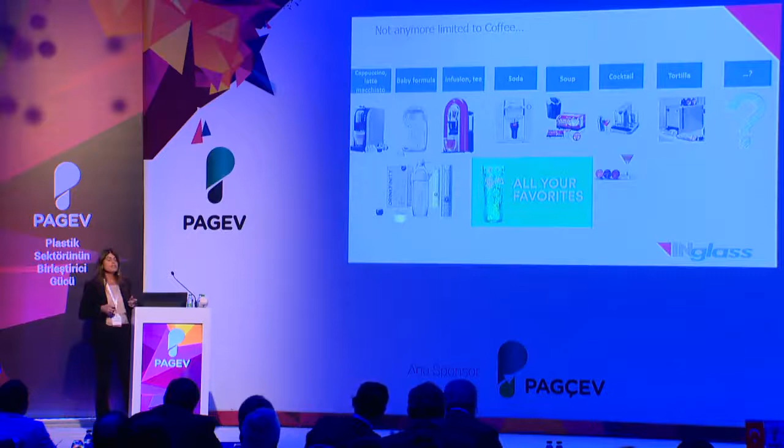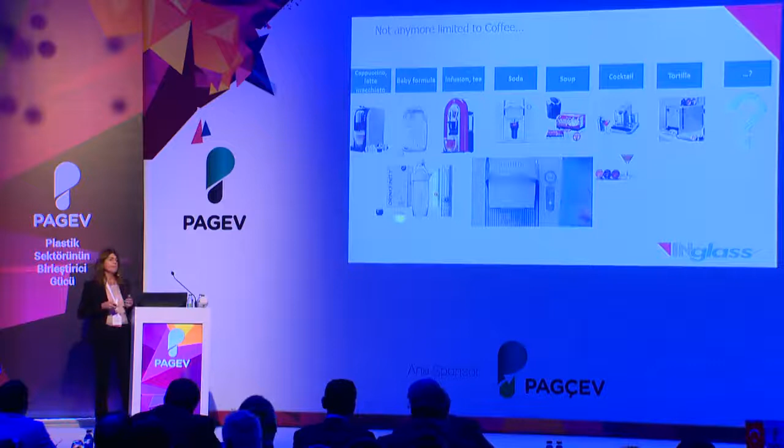This means that you can even have 1.5 liters of Coke or any other carbonated soft drink by using a machine exactly like the one you use at home for coffee. This is also going on with soup, with cocktails, with tortillas, and the idea is to use this also for products like meat, complete meals.

But coming back to our discussion panel, plastics are permeable. So what happens? Oxygen, odors, water can get in, and in the same way aroma can get out. So the plastic material selection is absolutely critical, and even more new materials are coming on the market which are challenging for the injection process.

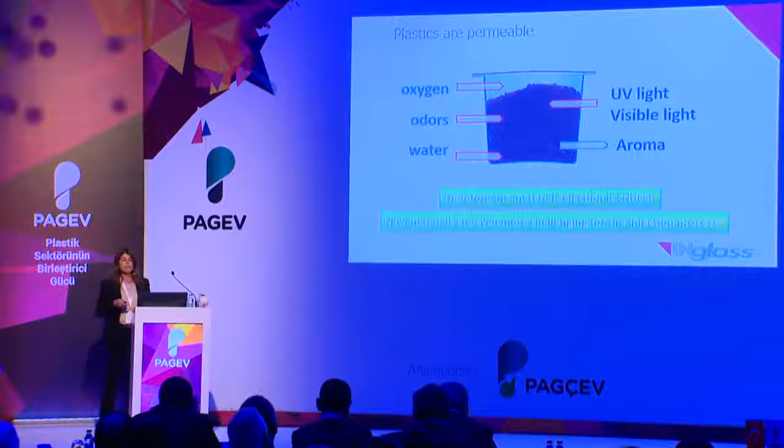For instance, today in this market, polypropylene is still one of the main resins used. Why this? Because of the easy processing, and I would say also the expertise that has already been acquired in this, good water vapor barrier, that is, I would say, better for powder but not for ready meals, and the compatibility with in-mold labeling and coating to enhance the oxygen barrier. That makes the product last longer.

One other resin, which is also starting to come, but which makes a difference in the difficulty to inject, is PET. Because PET is an attractive material which is accepted by the consumer, has an easy recycling chain, and is for sure better in oxygen barrier than PP, but it should be used in PET bottle grade. That is around intrinsic viscosity 0.82.

Then we have new materials coming up, and this is the key game now. PLA, so biosourced material, PBT with higher barrier but not so much biosourced, PEF, and more to come. And we also have to cope with the drivers, which are sustainability and performance, that is, again, the barrier. So the current challenge is really how to process them, and how to assure the best quality and ready-to-market single-serving capsule made of these challenging new technical resins, but in the shortest time.

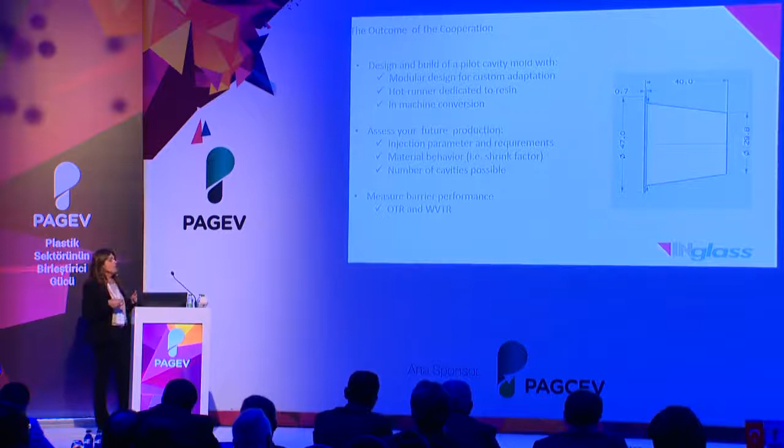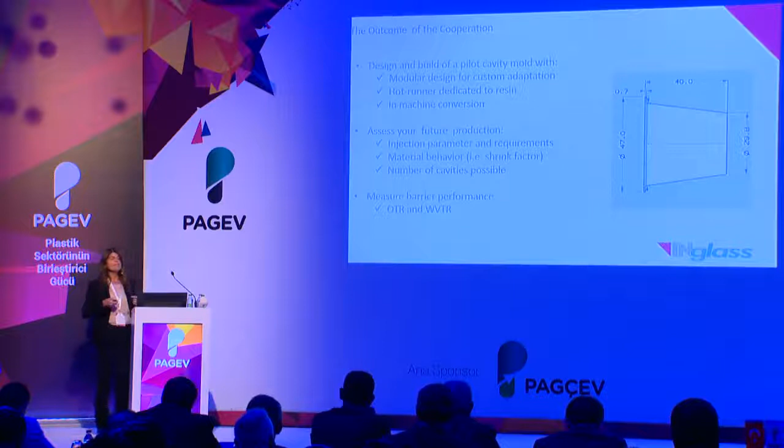The result of our cooperation is that we have built and designed a pilot cavity mold with a modular design for any customer adaptation. And also, of course, a hot runner dedicated to the resin that the customer wants to inject. There is also the possibility to use different versions in the injection machine, and so to convert very easily. In this way, you don't need to stop your production. You can have your design and development done by experts outside without a big investment.

The shape that we have chosen is an intermediate size among all the single-serving capsules which are right now on the market. And also the section of the part has different sizes according to the material injected. For instance, for polypropylene we have a thickness of 0.5 here and 0.4 on the side, while for technical materials like PET, PLA, PBT, we are using a thickness of 0.7 and 0.6 on the side. And of course, any other material which is in development can be tested here.

This mold offers versatility for any test layout, not only for testing resin, but also for testing in-mold labeling and plasma coating. I open a small parenthesis here: why IML? Because there is in-mold labeling now which is also functional, which has oxygen barrier in it. So you can have decoration and functionality in one step only. The point is that the in-mold labels now on the market are still polypropylene with EVOH film in it, but new sustainable ones are going to be developed.

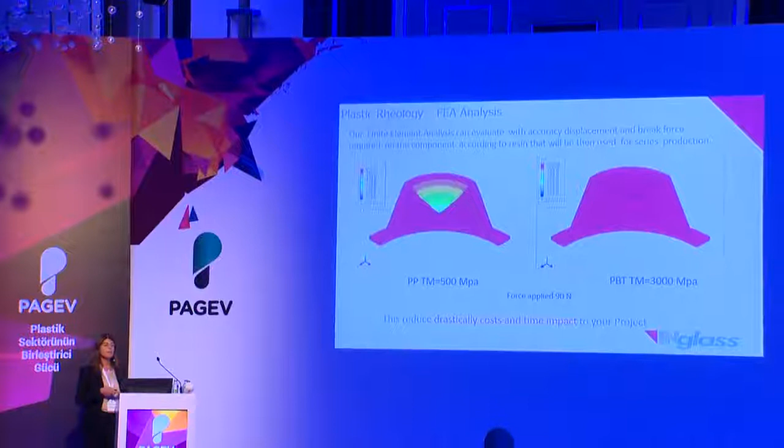If you see, so plastic rheology, finite element analysis, and the SLM conformal cooling technology, what could be also called 3D steel printing. Talking about the plastic rheology, with our finite element analysis we can evaluate with accuracy already the displacement and the break force which is required by the component according to the resin that is going to be used in production. I make an example just here.

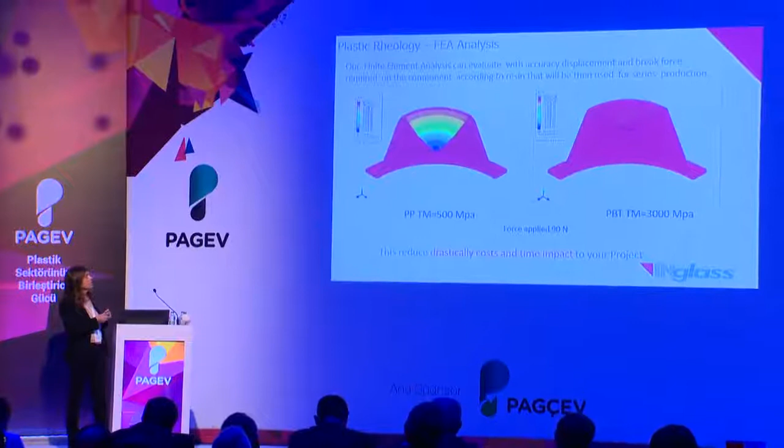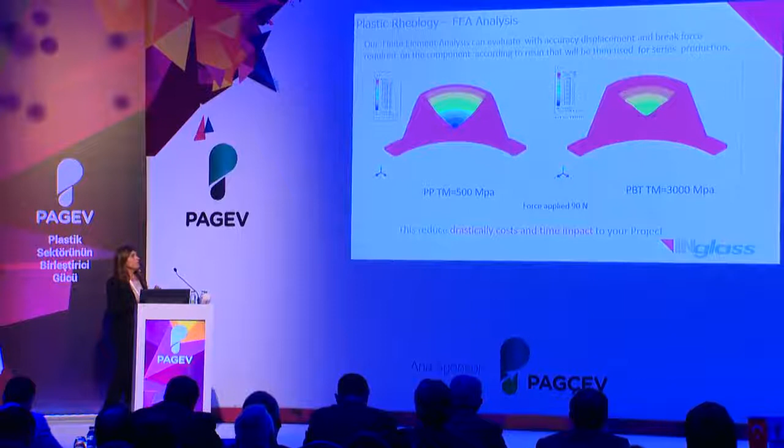You see here on the left side, you have the displacement using a kind of polypropylene, while on the right side you have the displacement that you are having with the PBT resin, at the comparison of the force applied of 90 Newton. This means that you can drastically reduce the cost and time impact to your project if you are thinking to get into this new market.

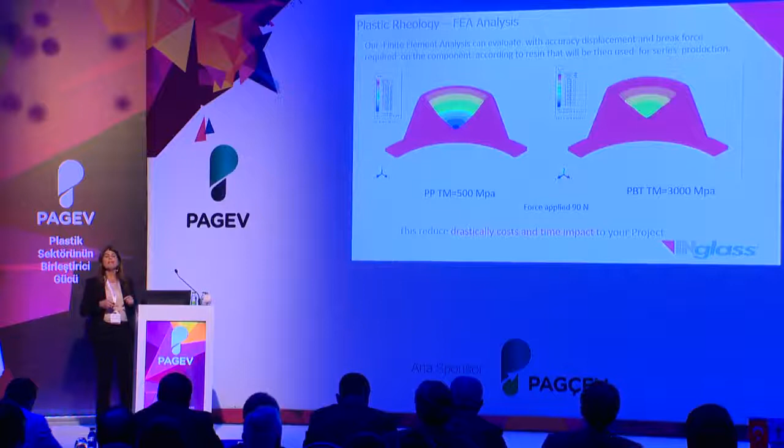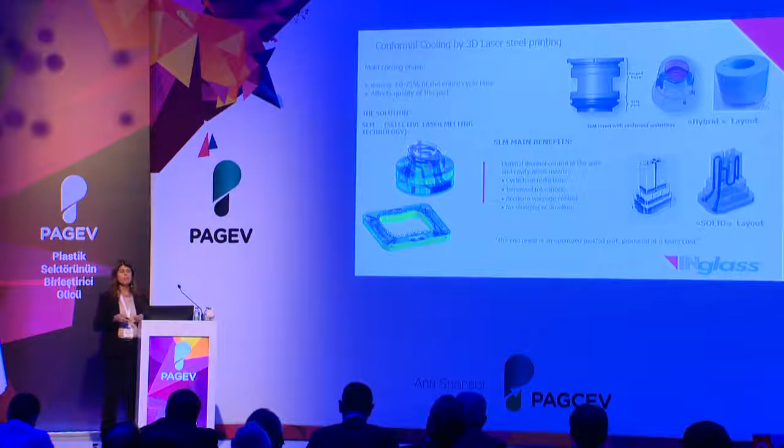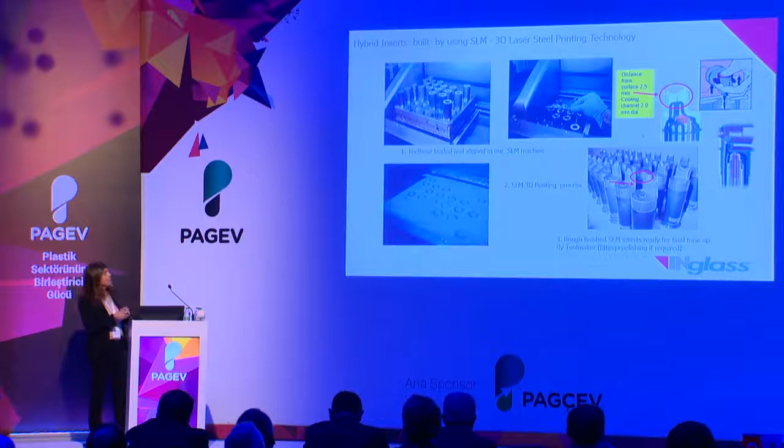Another technology that we have internally as our proprietary is the conformal cooling by 3D laser steel printing. Many of you probably know already, but the mold cooling phase means 60–75% of the entire cycle time, and it also affects in a large part the quality of the result. So in our company we can provide any kind of these inserts, and just very briefly I show you how this works. You have a base which comes out from the tool making directly. It is directly put into the machine, and then it starts the SLM 3D printing process.

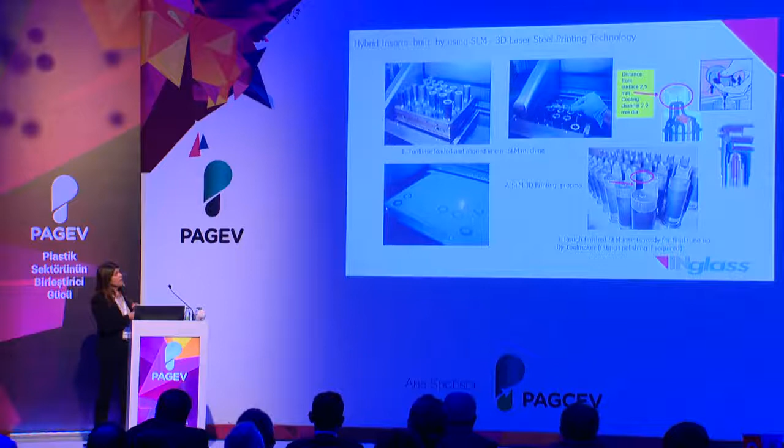In this particular case, it was used for this application, which is a tab where the sealing has to be very tight because a liquid is passing by. So we had to come with the cooling at just 2.5 millimeters from the molding surface, and also the cooling channels could not be so big because of the size available. So we made here cooling channels of 2.0 millimeters of diameter. So the result is, of course, a part that can keep the best cooling condition, even if the space is so reduced.

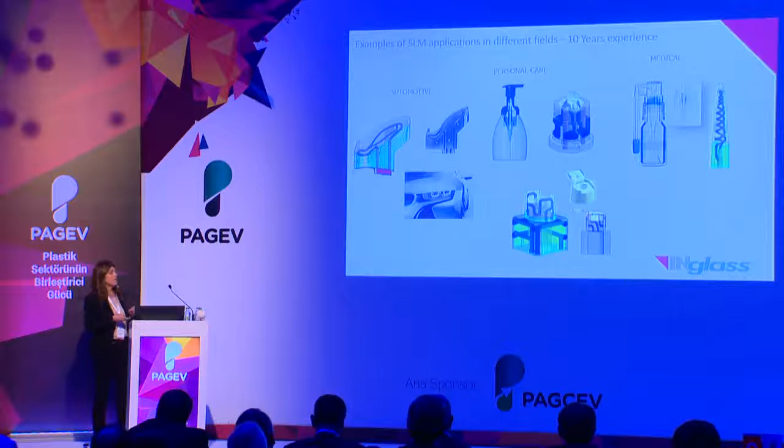Our experience in SLM application is in all different fields of plastic, from automotive to personal care to medical as well. Coming back to this application in particular, specifically the mold I showed you before, we designed the SLM technology for the cooling nozzle bushing, for the cavity, and for the core insert. Why? Because the important thing is to have a very good conformal and even temperature that you could not reach without having the cooling bushing close to the nozzle.

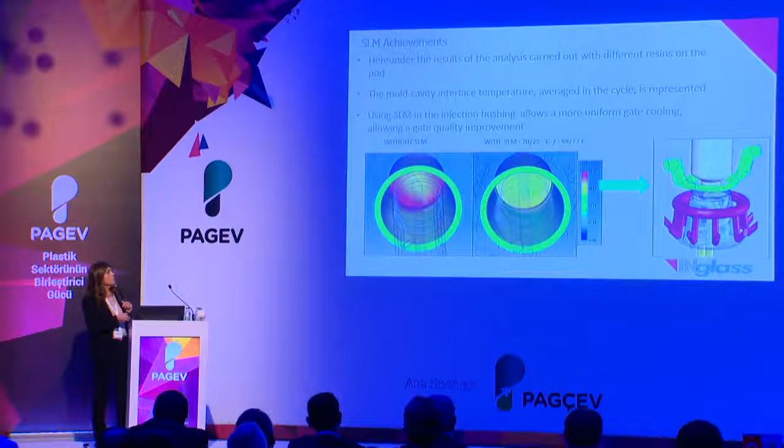You get even 25 degrees less and also very nice uniform cooling. That is very, very helpful when you talk about materials such as crystal clear PET. More than the results that you're having in the injection of PET, even at very low thickness like 0.6, 0.7, there is also the fact of reducing the cycle time around 30% compared to traditional.

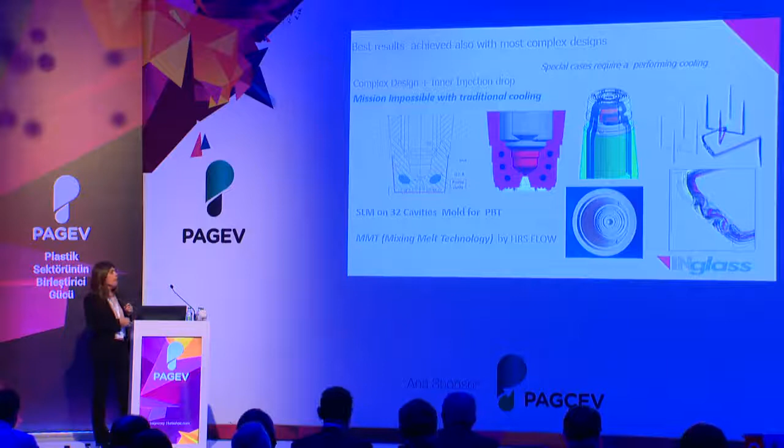Finally, an example of a latest coffee capsule in PBT material. In this case, we built for the customer a tailor-made solution because the injection point wants to be in the pot. We put all the cooling circuits just around the nozzle inside the pot, and in this way we were able to inject a system of 32 cavities for a coffee capsule in PBT, also by using our mixing melt technology, where we also use the conformal cooling section into the channels of the hot runner.

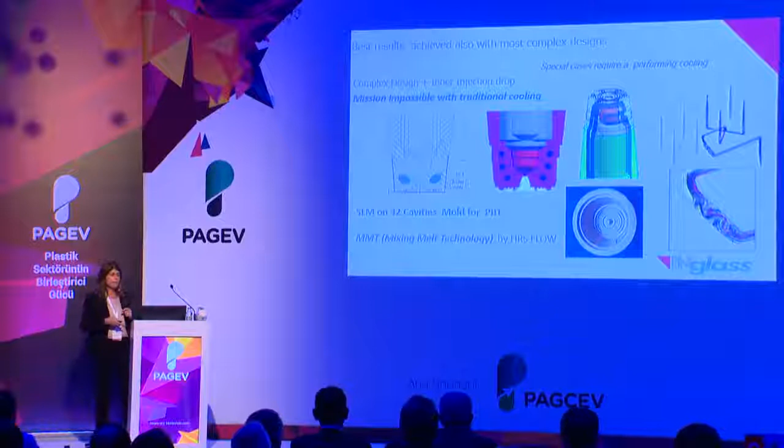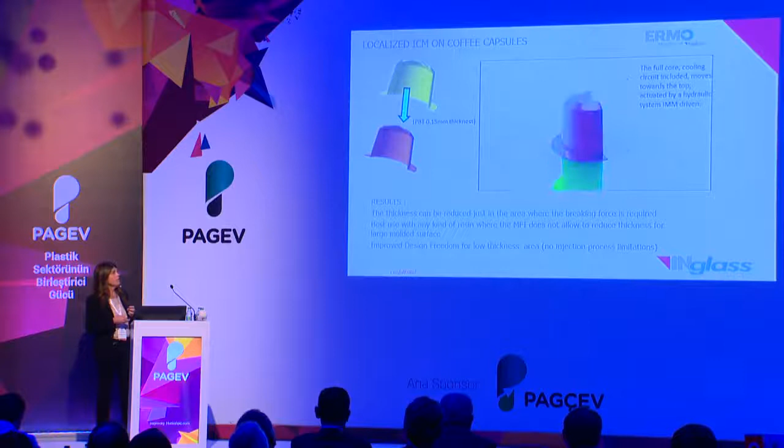This is another application that you can also combine with the previous one with the conformal cooling: using injection compression to reduce the thickness of the part just in the area where it is required. You see injection and then it is compressed. This helps with the breaking force needed by the coffee machine or any different single serving machine that is on the market or which is going to be in the future.

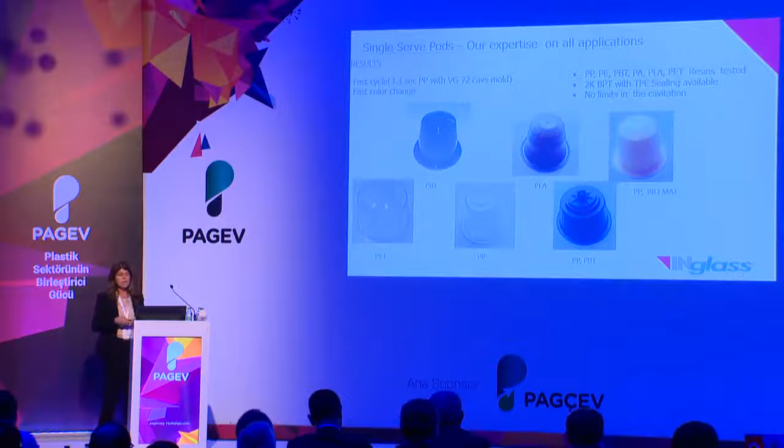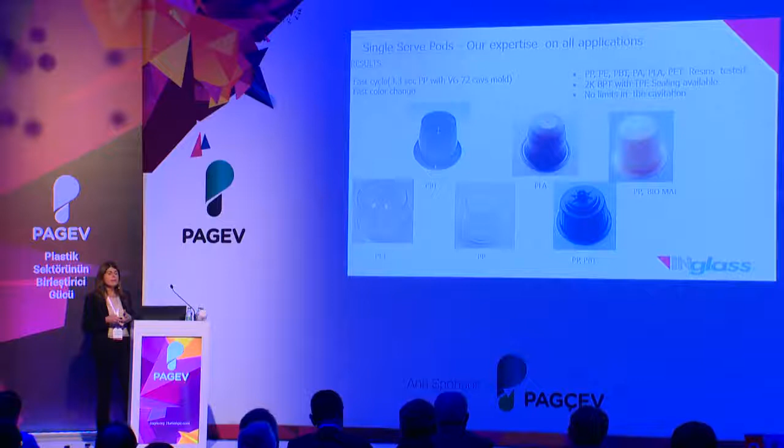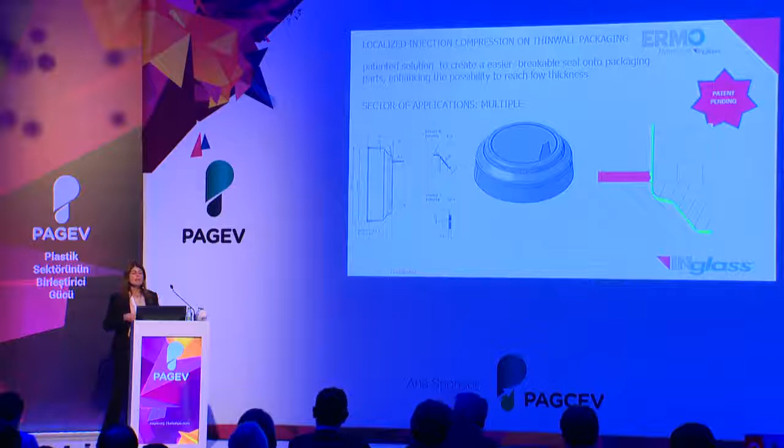So finally, I would say we have expertise in all this kind of application, not only for coffee but also for products and single serving that are going to change the way meals are served. In fact, one of the latest largest parts that we have developed is a larger application that can be a single serving cup, or even a cap, which has an area where the thickness is really very thin, up to 0.15 millimeters. This, of course, can have an application in any field.

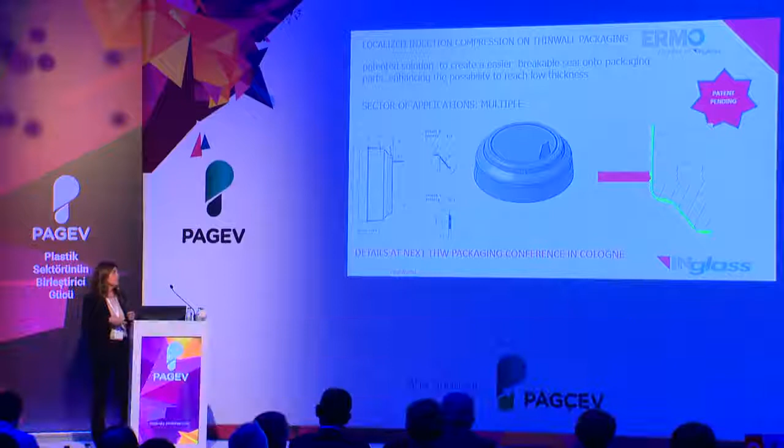It is a patent pending solution, and more details of this will be shown during the next thin wall packaging conference in Cologne, Germany, by AMI.